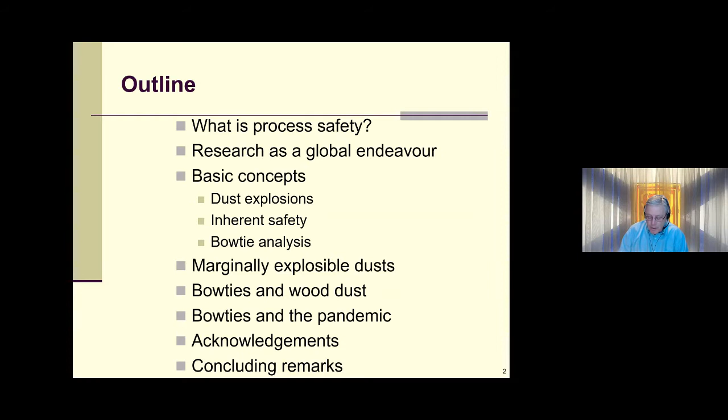So what is process safety? I've got a slide, but I'm going to first let the U.S. Chemical Safety Board describe what process safety is all about.

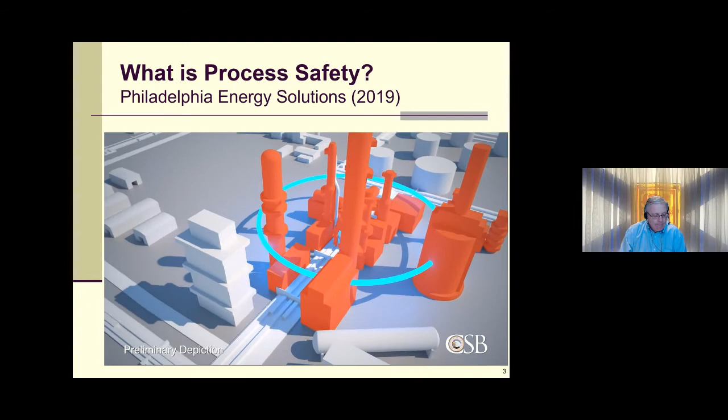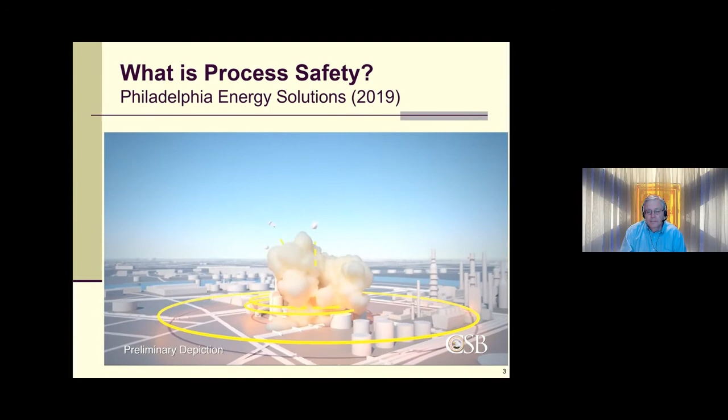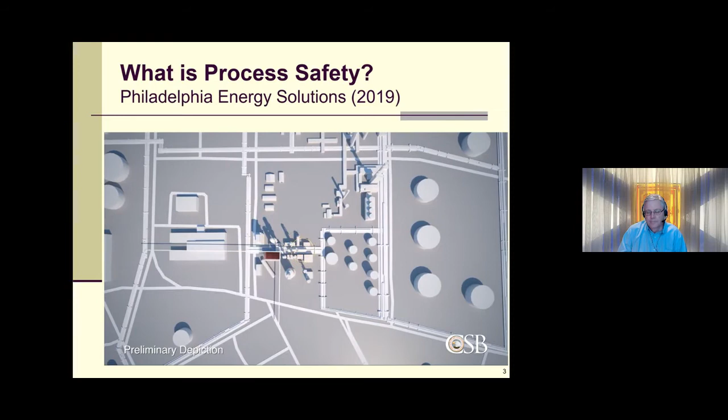June 21st, 2019. The Philadelphia Energy Solutions Refinery in Philadelphia, Pennsylvania. At 4 a.m., flammable process fluid containing mostly propane, along with a small concentration of highly toxic hydrofluoric acid, or HF, escaped from the refinery's HF alkylation unit, likely through a ruptured pipe elbow. The alkylation unit produced components of high-octane gasoline. The leaking process fluid formed a large ground-hugging vapor cloud that surrounded some sections of the unit. Two minutes later, the cloud ignited, causing a massive fire. A control room operator quickly took steps to prevent the release of additional HF by rapidly draining the unit's hydrofluoric acid to a special vessel designed to hold the acid in the event of an incident. At 4:15, during the ongoing fire, an explosion erupted in the alkylation unit. Four minutes later, a second explosion occurred. At 4:22, a process vessel in the unit containing flammable hydrocarbons violently ruptured, causing the largest explosion. A large 38,000-pound fragment of the vessel flew across the Schuylkill River and landed on the river's opposite bank. Two other fragments, one weighing about 23,000 pounds and the other about 15,500 pounds, landed inside the refinery. The fire burned for over 24 hours until it was finally extinguished the following day at about 8:30 a.m. Five workers sustained minor injuries during the incident and response. The CSB is unaware of anyone experiencing health impacts from the hydrofluoric acid release.

That's what the principles of process safety try to prevent. We'll just move on here. Just kind of hung up a little bit, but we'll get there. Oh, we don't want to watch that video again.

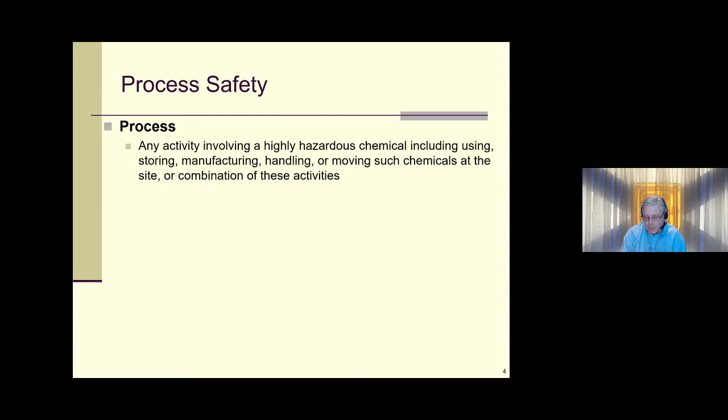There we go. So here's the slide on process safety. I thought the video would do a better job of explaining the type of incident that we try to prevent with our principles of process safety, but here's a few definitions. Chemical engineers are often thought of as process engineers, so I thought I'd first define a process. It's really just anything that we do in chemical engineering and process engineering that involves highly hazardous chemicals, and that's a lot of the operations that chemical engineers undertake.

So what is process safety? It's the prevention and mitigation of process-related injuries and damage arising from the big three things we try to prevent: fire, explosion, and toxic release. Some people would call this system safety, and that's our focus. We try to prevent and mitigate loss to people, property, process, and environment. Property loss is equipment damage, asset loss. Process loss is business interruption.

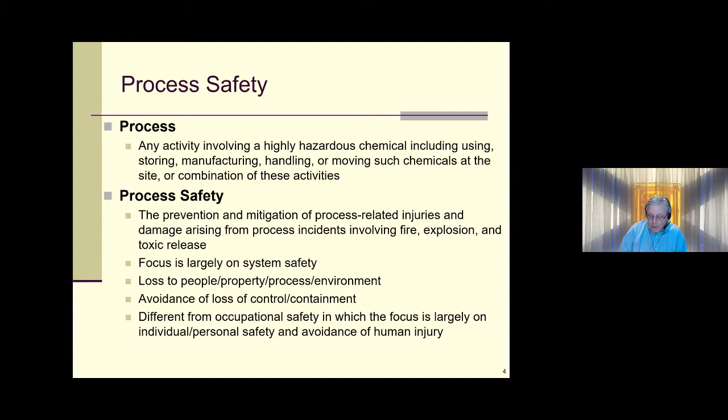We also try to avoid loss of control of chemical processes and loss of containment of what's inside the pipes and vessels. So as you can see, process safety is very different from occupational safety, in which the focus is largely on protecting the individual and the avoidance of human injury. As I mentioned, we talk about process safety being about keeping it in the pipes, and the 'it' is the hazardous materials and the energy that they contain.

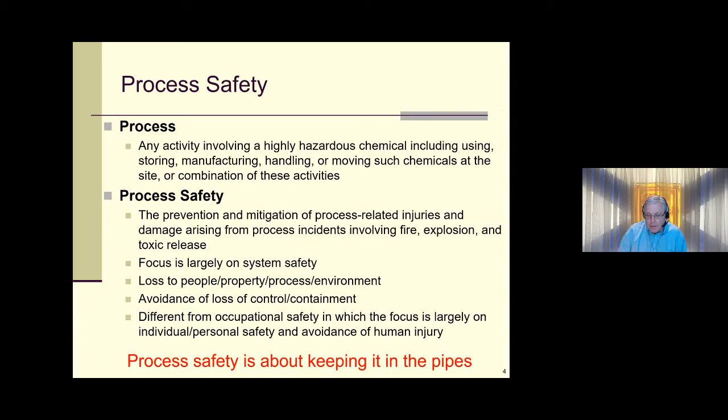When we don't keep it in the pipes, we end up with catastrophic incidents such as first Bhopal in 1984, release of methyl isocyanate, which killed thousands of people that night in December 1984 and has caused untold suffering to this day.

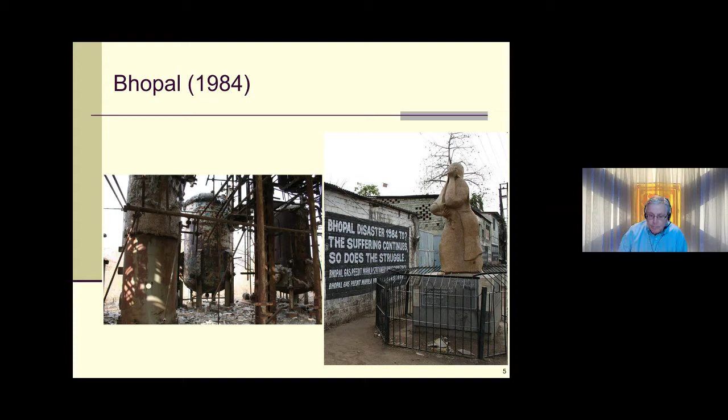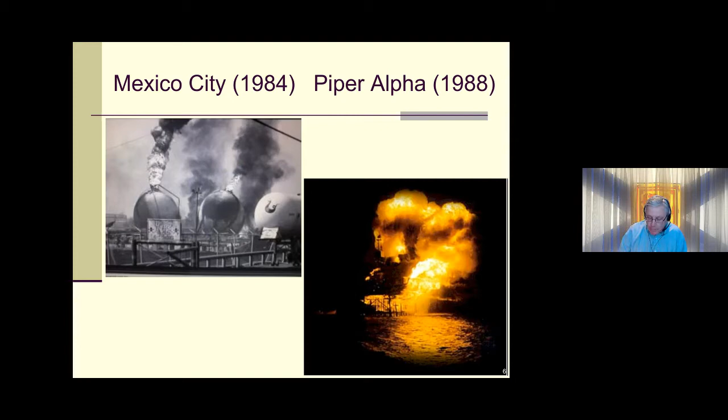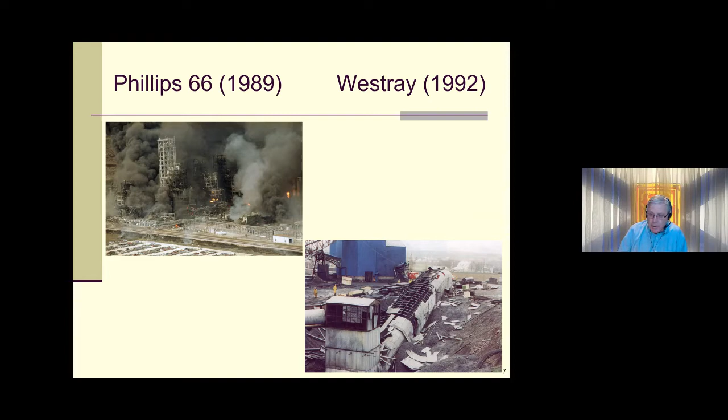Mexico City in 1984, liquefied petroleum gas. An offshore oil and gas rig, Piper Alpha, in the North Sea. Phillips 66, 1989, a polyethylene plant which suffered a vapor cloud explosion. I've included Westray here, not the process industries per se, but obviously a devastating incident in our own backyard, in 1992, in which 26 miners were killed.

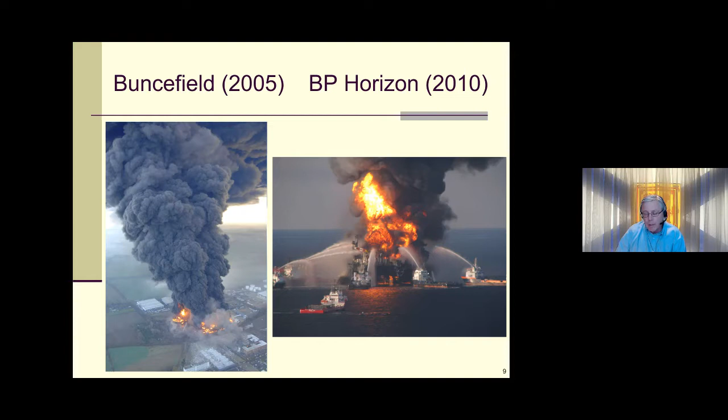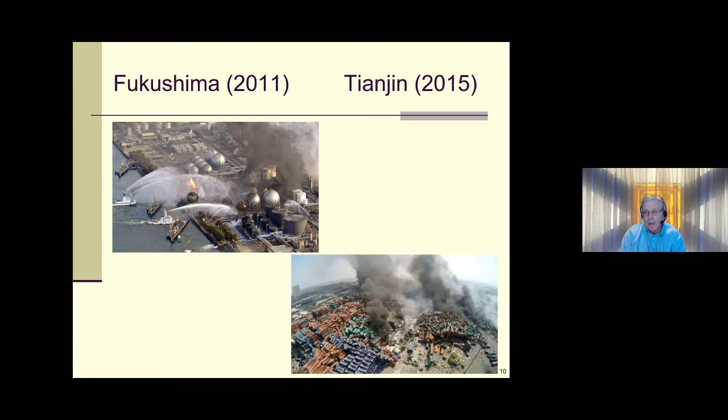Tianjin, a port in China, again an ammonium nitrate explosion. And most recently, of course, you'll be familiar with what happened in the port of Beirut in Lebanon. Again, massive quantities of ammonium nitrate being stored inappropriately. Not a process incident again, but there were many, many warning signs from the process industries that could have helped prevent this type of incident.

So I just wanted to talk a little bit about what we tried to do over the past 10 years in taking our research globally and collaborating with people around the globe. Of course, here we are in Halifax with our team at Dalhousie and local people as well.

My primary research colleague is Dr. Faisal Khan at Memorial University in St. John's, so put him up and his team of people there. Faisal happens to be in Winnipeg right now with family. And truth be told, the two of us have been trying to get down to Texas A&M to the Mary Kay O'Connor Process Safety Center for sabbatical, but unfortunately I don't think that's going to happen. So we'll take that off the map for now, at least for a while.

We are collaborating. One of the projects I'll talk about is with people in British Columbia in the wood pellet industry. The Marginally Explosible Dust project that I'll run through shortly involves the work of Albert Addo, a PhD candidate. Albert went home to visit family in Ghana for Christmas, and Albert's still in Ghana and likely will be there for some time, but that's all right. We're proceeding virtually, and his safety is first and foremost.

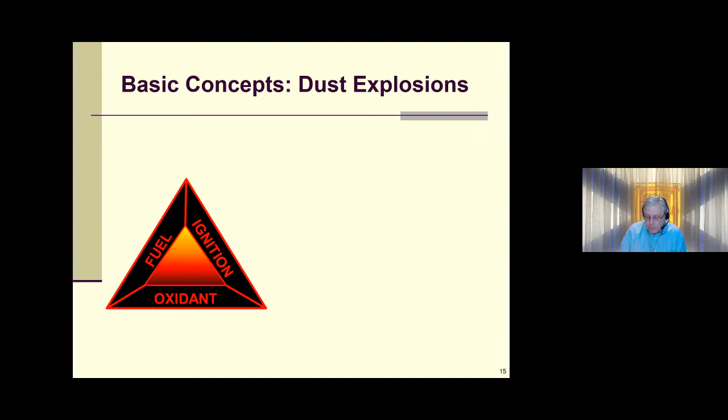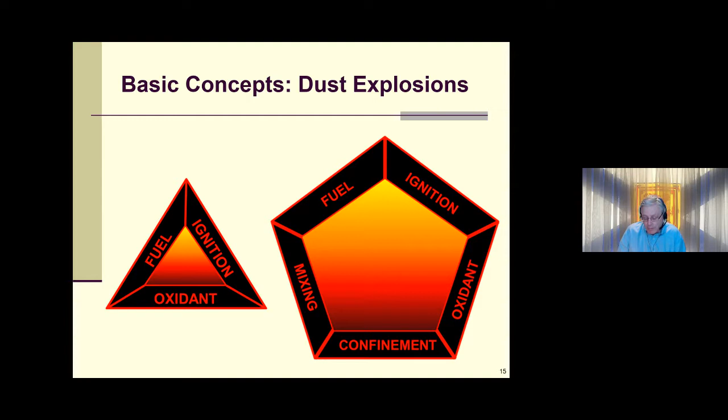We get to the explosion pentagon by adding two extra sides to this construct. The first is mixing: we need to get the dust airborne and formed into a cloud, so we have mixing of the fuel and the oxidant, which is the oxygen in air. Then we have some degree of confinement around that cloud. As combustion proceeds with ignition, the temperature rises, and the pressure also rises because of the confinement. Then we have mechanical work done on the boundaries of that confinement, and that's giving us an explosion.

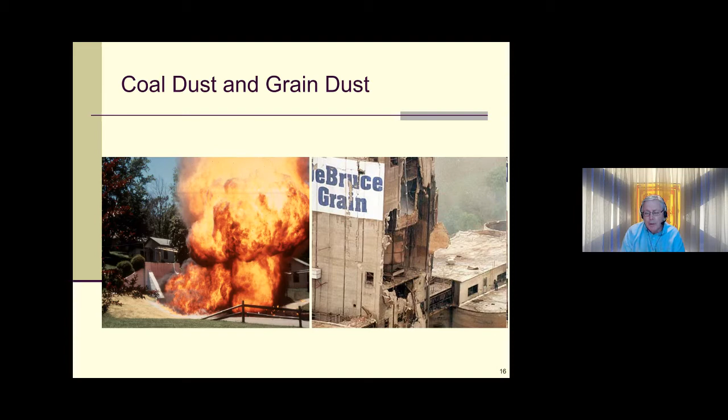You're probably familiar with coal dust and grain dust explosions. I mentioned Westray. Coal dust explosions happen, unfortunately, throughout the world with alarming regularity. Grain elevator explosions as well.

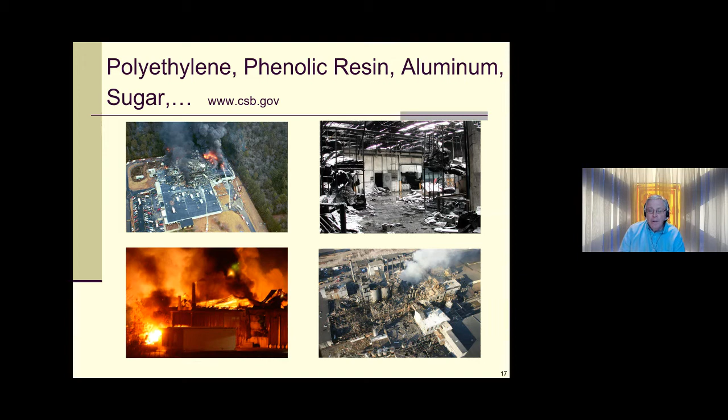But there are many other materials that can lead to a dust explosion. For example, polyethylene, and these are pictures of incidents investigated by the U.S. Chemical Safety Board over the years. Polyethylene, phenolic resin, aluminum, many metals, most metals are explosible. The bottom right-hand corner shows the devastation at the Imperial Sugar Refinery just outside of Savannah, Georgia. A horrific incident with a large number of fatalities and complete destruction of the process plant. So I want to show you an example of a dust explosion.

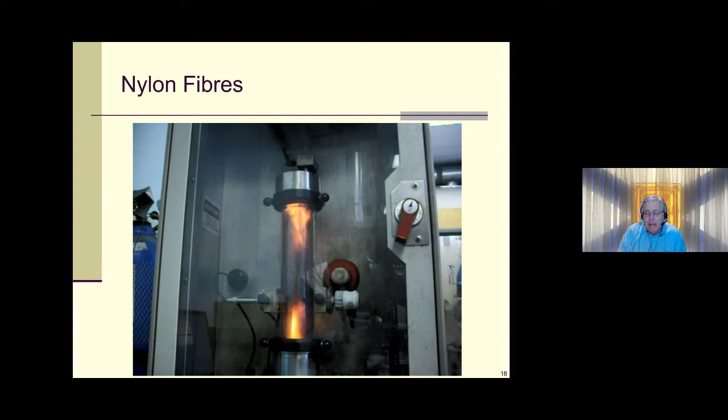So what you saw was the initial explosion. I should mention this is for nylon fibers, but then also lingering combustion in the cloud. This gives us some insight into the horrific accidents that occur sometimes in textile mills where fibers burn and explode. The shock wave, the blast wave from the explosion, does damage, but also significant harm to people occurs because of the flames that linger once the initial blast wave has passed.

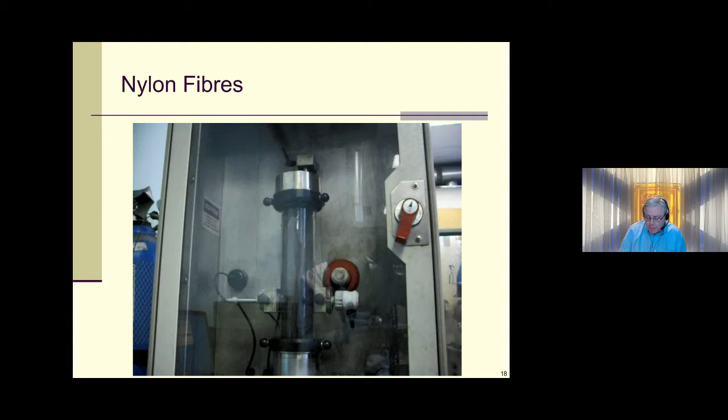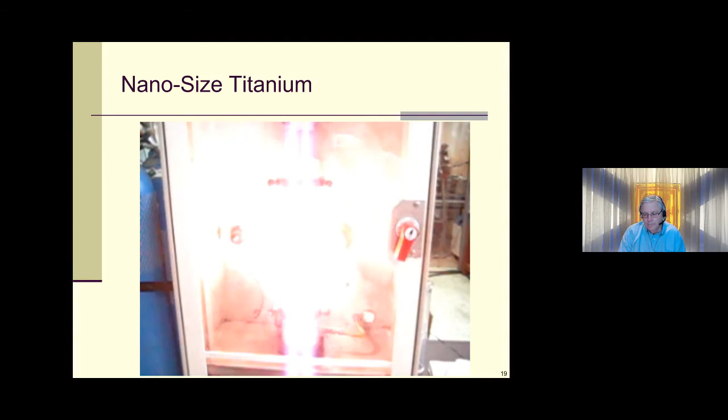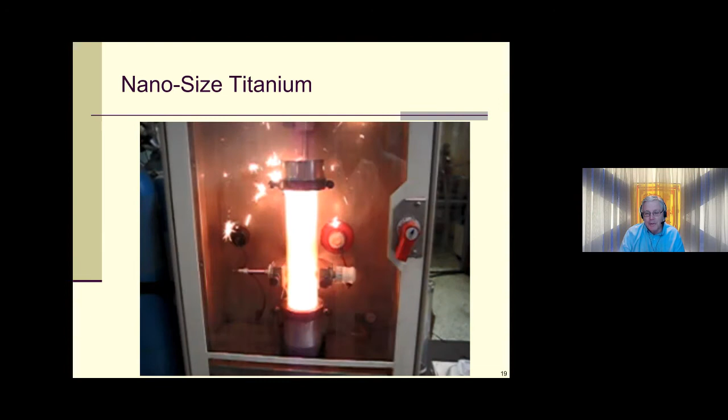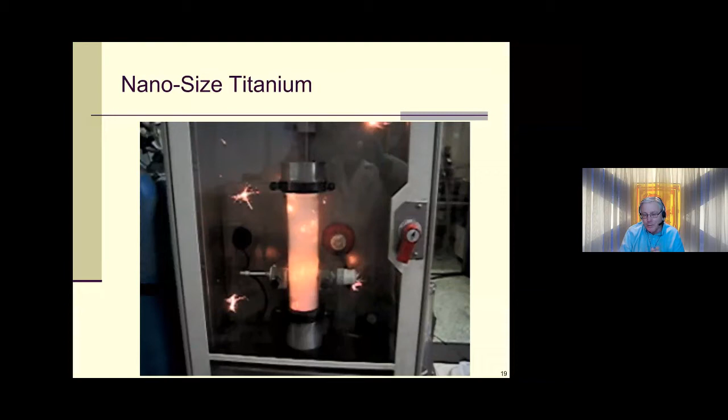Now it's a little more dramatic than it needs to be. That's just a normal digital camera, there's no filters or anything, so it's a lot of light coming into the camera lens. But you can see that the burning and the explosion is quite different from what we saw with the nylon fibers. You can see in the plexiglass screen there, that's Ivan Yarossi, an exchange student from Turin in Italy. Wonderful young man, came and spent 6 months with us. Great researcher. It's amazing, he never flinched during the taking of that picture.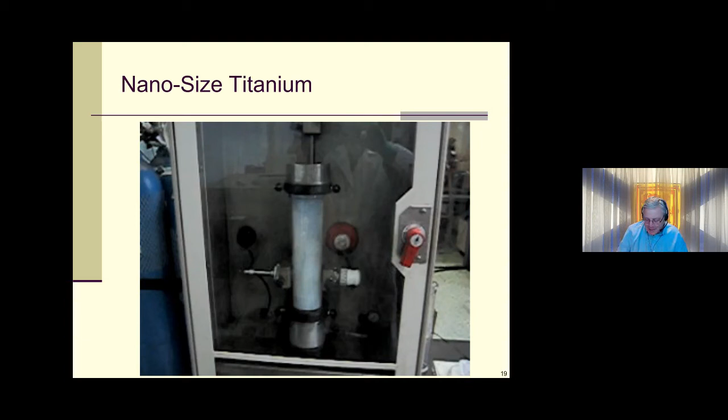All right, the second basic concept is inherent safety. This is a concept that was developed by Professor Trevor Kletz in response to what happened at Flixborough in 1974. About 40 tons of a chemical called cyclohexane, similar to gasoline, were released at this plant. It was a nylon intermediate plant.

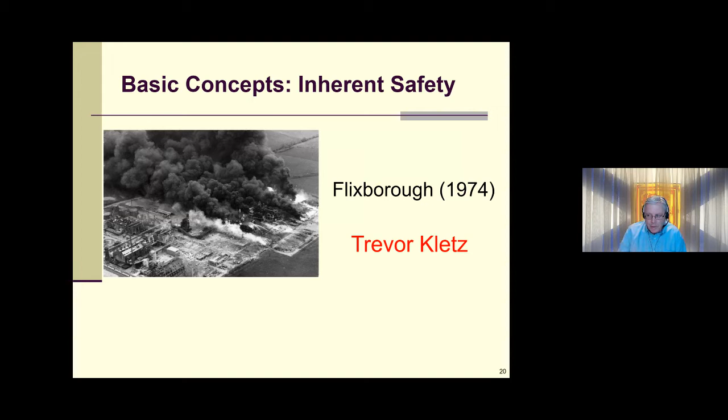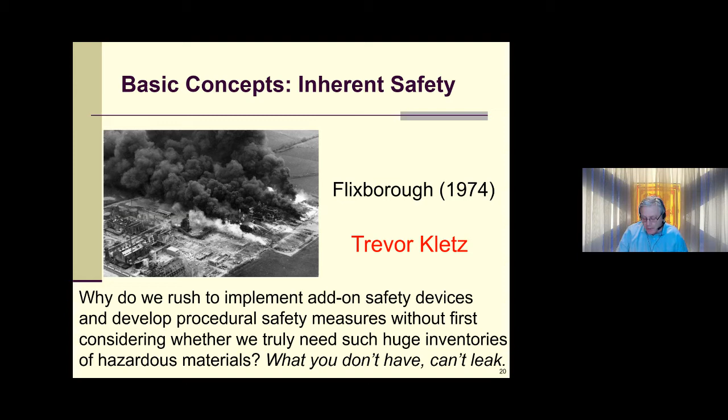As a result of this incident, a lot of people started thinking about adding on safety devices and developing procedures. Trevor asked, why do we rush to implement add-on safety devices and develop these procedural safety measures without first considering whether we really need these massive inventories of hazardous materials? He wrote a paper and coined the phrase, what you don't have can't leak. So with inherent safety, we're talking about trying to remove hazards at their source.

A couple of quick examples, classic Kletzian examples. If we're concerned about the hazard of stairs in a 2-story house, we can add landings and handrails and tell people to be careful, or we can remove the hazard and live in a 1-story house. Easier said than done, but that's the basic principle.

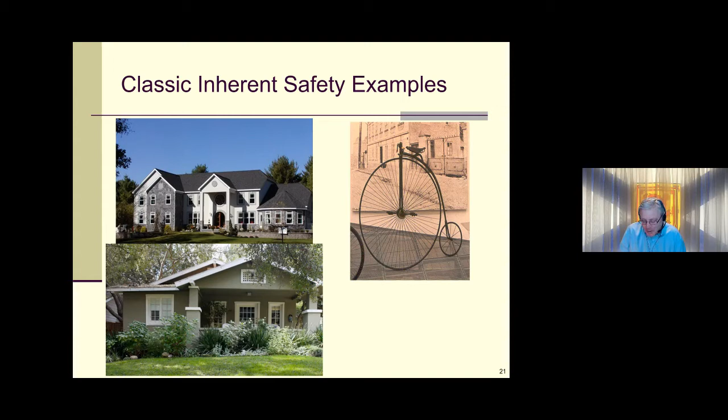There's a strong life cycle approach to this concept as well. From a stability perspective, what's inherently safer than that antique-looking two-wheeler there? Of course, it would be a tricycle. So that's the essence of inherent safety.

We place inherent safety in what we call the hierarchy of controls. When we're faced with a hazard, there are only 4 general ways we can deal with it. Least effective, work with people, safe work procedures, and so on. Next, in terms of effectiveness, we add on safety devices that require actuation and detection, sprinkler systems, for example. Then we add on safety devices that don't require actuation and detection, they just work by their mere presence, so an explosion rupture disc, for example. Most effective is inherent safety: eliminate hazards, minimize hazardous inventories, substitute with more benign materials, and so on.

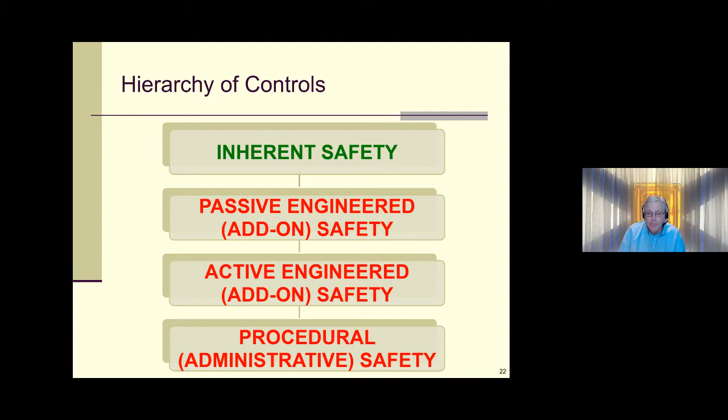The third basic concept is called bow tie analysis, and this is a form of hazard identification and analysis.

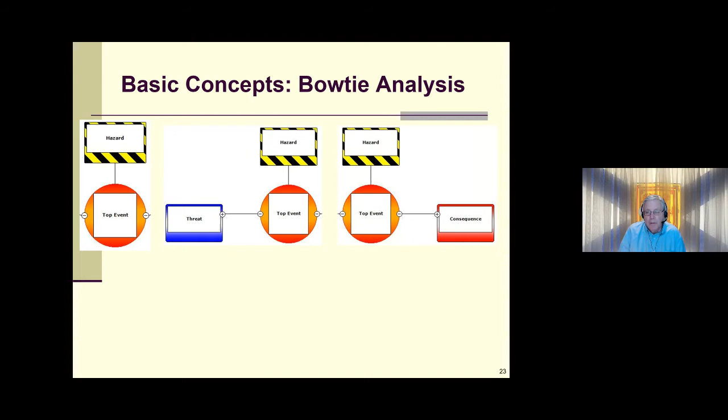So we start with a hazard that will lead to a top event. This is something we don't want to happen. The top event will be caused by a threat, and usually there are many threats that will lead to that top event. There will be consequences arising from that unwanted event.

But we can put barriers, prevention barriers, between the threats and the top event. These are our safety devices that act before the incident occurs. And we also put barriers between the top event and the consequences. These are called mitigation barriers, to help deal with the severity of the consequences.

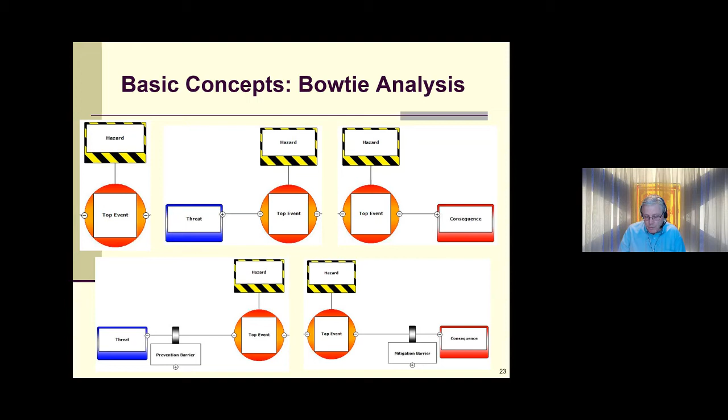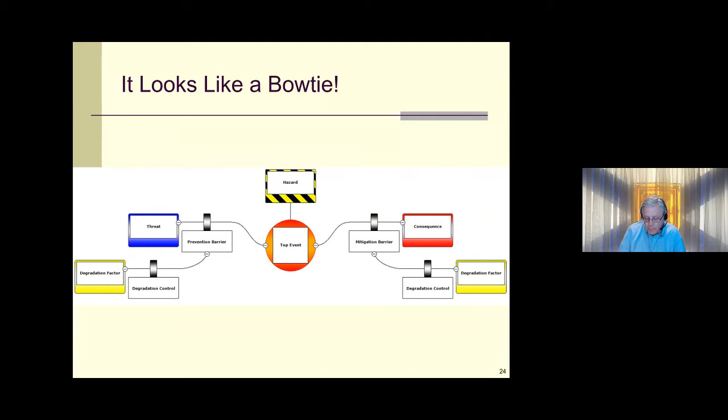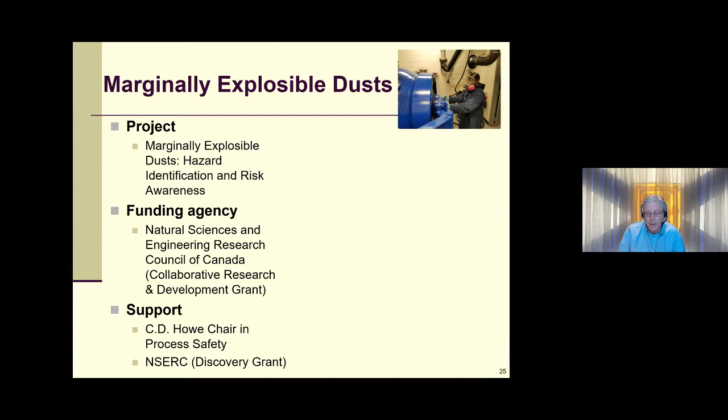So the first project I wanted to talk briefly about, these are things we have ongoing right now, is on marginally explosible dusts, funded through NSERC, through a Collaborative Research and Development grant with support from the chair and also my discovery grant. People involved at Dalhousie are myself and Albert Addo.

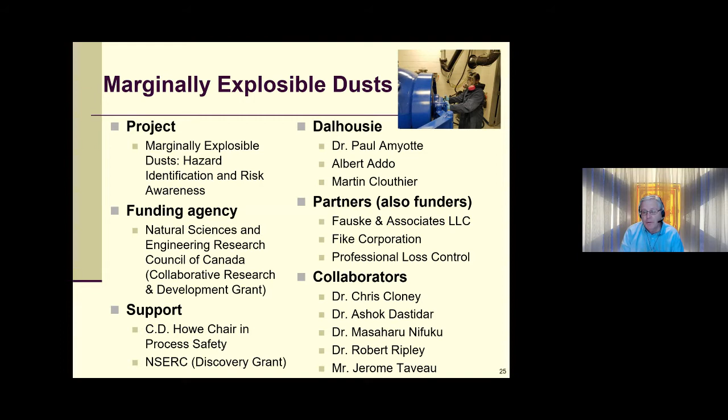There's Albert in that picture, pre-pandemic, operating the one cubic meter chamber in which we've done some testing. Martin Clouthier, a PhD student here in Halifax, also a consulting engineer. And you can see our partners located in the US and Canada, Professional Loss Control in Fredericton, New Brunswick, and also the key collaborators. So this project is all about a matter of scale.

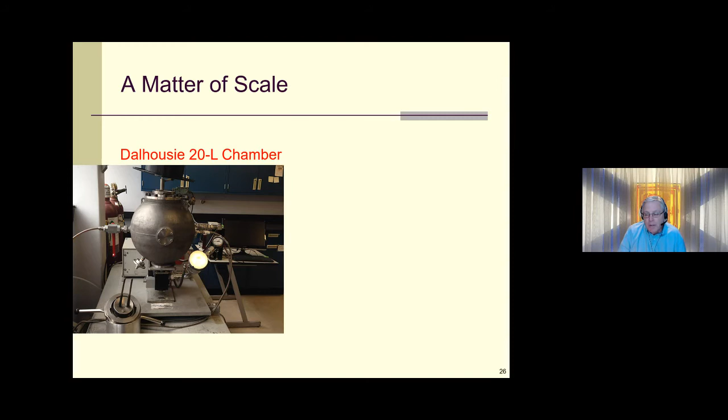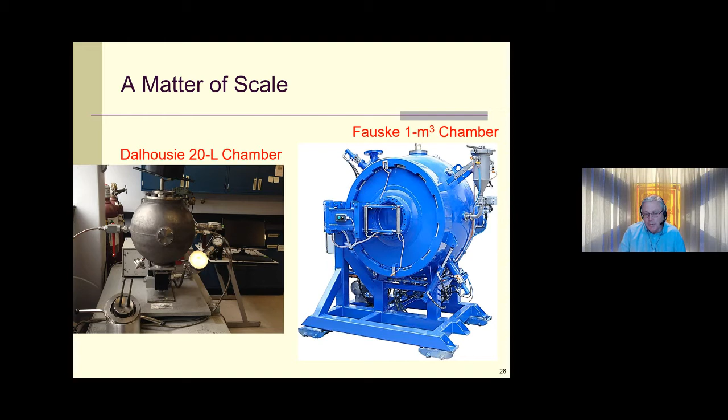But what we determine in this 20-liter chamber has to be applicable to industrial scale. So we check at the intermediate stage of a 1 cubic meter chamber, 50 times the volume, 50 times as much dust per test. You can't do as many tests per hour, maybe 1 per hour. There's Albert again, demonstrating that he can use that chamber.

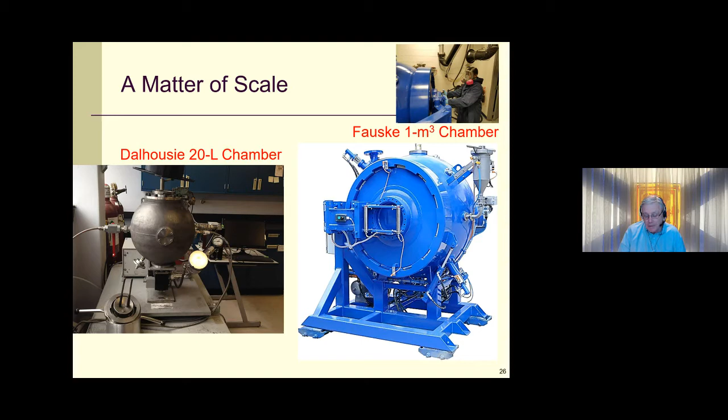This chamber is the one that I mentioned, with Dr. Ashok Dastidar at Fauske, just outside of Chicago. So what's the problem with this? Well, it's a dilemma for industry.

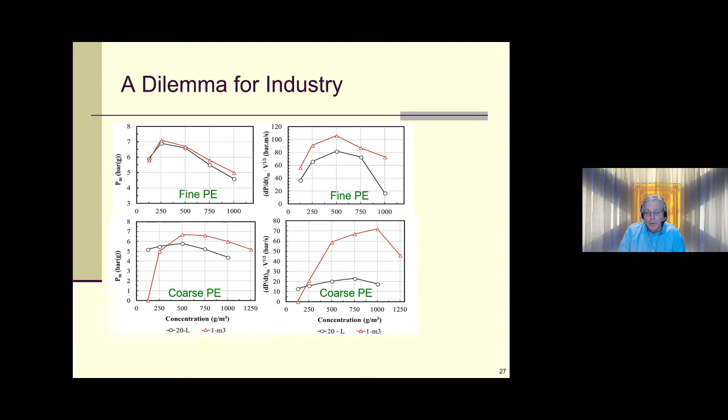The red line, the triangles, that's the 1 cubic meter chamber data. The black line, the circles, that's the 20-liter data. We'd like those 2 curves to match up very well, and they generally do, except here for the coarse polyethylene with the rate of pressure rise.

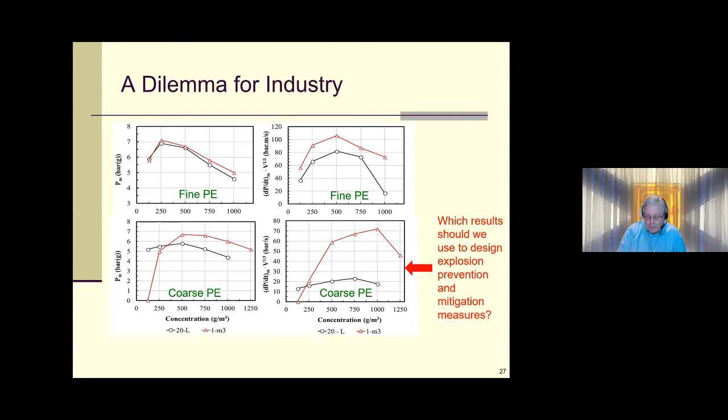So which results should we use to design explosion prevention and mitigation measures? It really matters. It's expensive to bring in these measures, so we don't want to overprotect, but if we underprotect, or say the dust doesn't explode when in fact it will at industrial scale, we're obviously greatly increasing the risk. So there's a number of groups throughout the world, including ours, working on this.

Current status for us is we've just completed some testing, again with Albert in Ghana, Ashok in Chicago, and me in Halifax. So we've got the data acquisition, and now we're analyzing carbon black, which we obtained from Michelin, oat grain, urea, and zinc. So that work is ongoing.

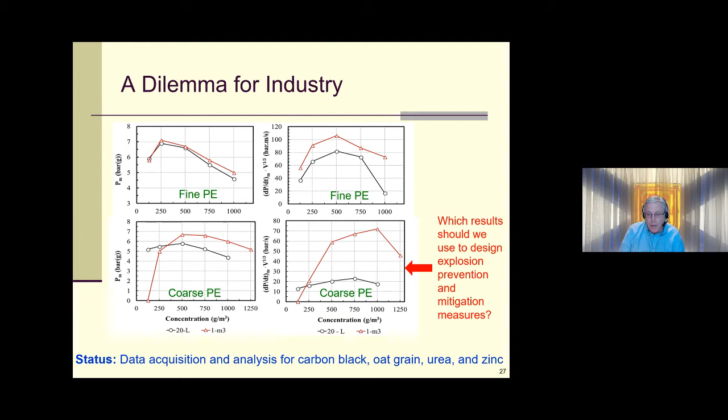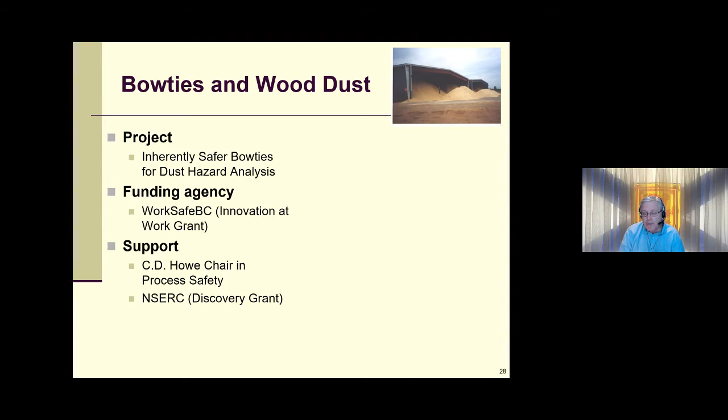The second project I wanted to talk about is a very recent one, using bow tie analysis with combustible wood dust. The funding agency here is WorkSafe BC, supported by the chair and my discovery grant again.

People at Dalhousie are myself, Eric Brideau, a master's student. Eric's also a consulting engineer in Halifax. Kayleigh Rayner Brown, a research associate with me. Kayleigh did her master's, finished last year, one of the first people to defend her master's degree during lockdown. She's just doing an excellent job in facilitating these bow ties with our partners out west.

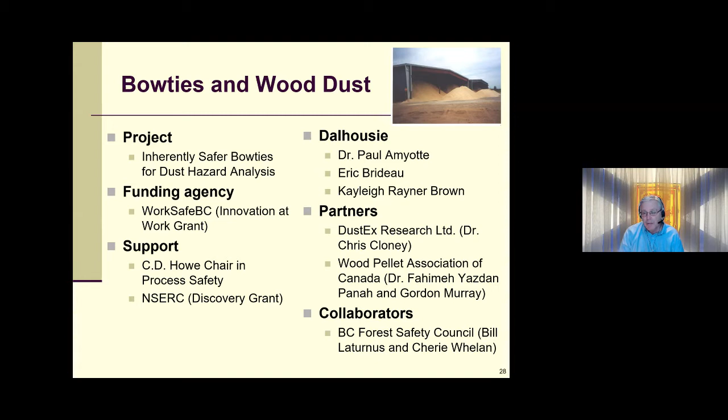And you can see Chris Cloney here in Halifax is one of the partners, as well as Wood Pellet Association and BC Forest Safety Council.

So what are we doing here? Well, here's an example of a hammer mill. This is used in the wood pellet industry to take sawdust, wood chips, and reduce their particle size to get them ready to be made into pellets. Here's the bow tie knot.

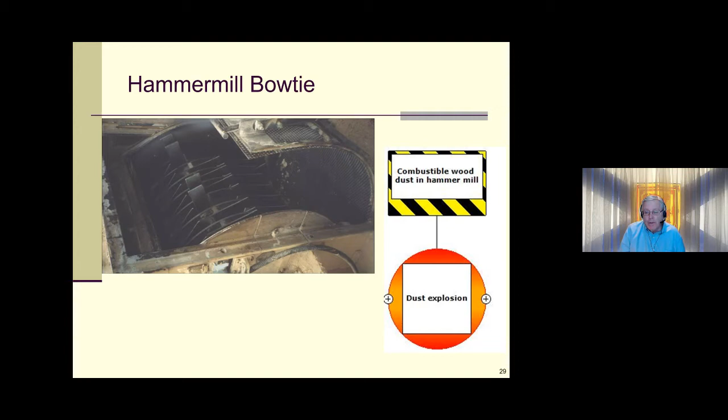The hazard is combustible wood dust in the hammer mill. The unwanted event, the top event, is a dust explosion. We have lots of threats, and I realize those are a little bit difficult to read, but they all relate to different types of ignition sources that could occur. We have lots of consequences, and they all relate to people being hurt in various ways, to business interruption, to asset damage, to harm to the environment.

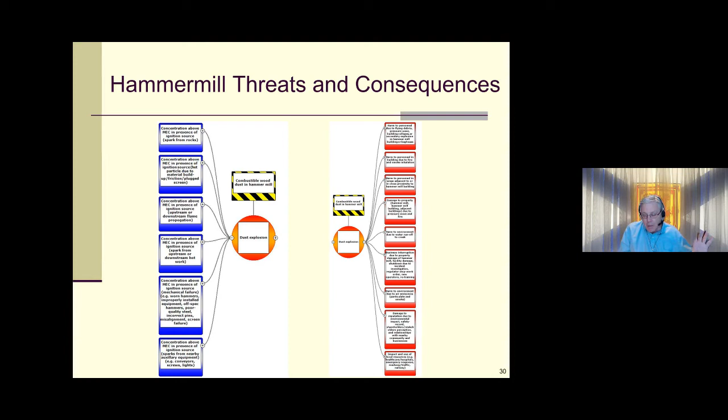Oh my goodness, we put in a whole bunch of prevention barriers. That's getting busy, let's get one you can see. So this is for the threat of an ignition source due to foreign debris, rocks, and tramp metal coming into the hammer mill with the feed stream. So we have a prevention barrier of mechanical scalping roll to separate rocks from fibers.

The next barrier I want to show is for the threat of hot work, bringing ignition sources, say for welding, onto site. So here our barrier is use of fire extinguishers and fire hoses and equipment being maintained and so on. Those are procedural, active type barriers. They're not inherent safety yet.

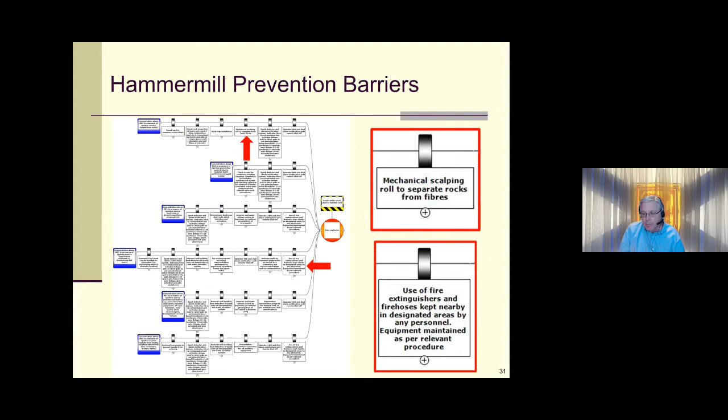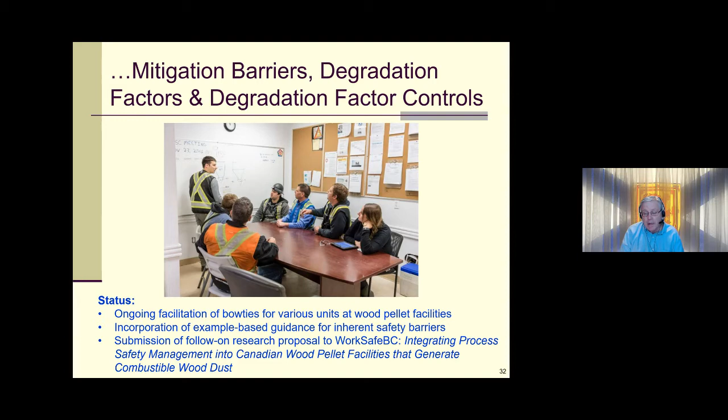So now we're working on incorporation of example-based guidance to get more inherent safety thinking into these barriers. We've also just submitted a follow-on research proposal to WorkSafe BC with our partners this time, Wood Pellet Association of Canada and the BC Forest Safety Council.

So getting near the end, the final project that I wanted to talk about that we have ongoing is working with, directly related to the pandemic, using bow tie analysis.

So 2 projects, one last summer funded through the Nova Scotia COVID-19 Health Research Coalition. And we developed a number of bow ties looking at hazards and different receptor groups, threats and consequences for the novel coronavirus. And we were successful with that work, successful enough to then apply and receive an NSERC Alliance COVID-19 grant. This has also been supported by the CD Howe Chair.

People working here, myself, Peter Vanberkel in industrial engineering at Dalhousie. Peter has been absolutely instrumental to this work with his knowledge of the healthcare industry and so on. And also, it's great to be working with an industrial engineer. Love chemical engineers, but it's not quite interdisciplinary, but it's getting there.

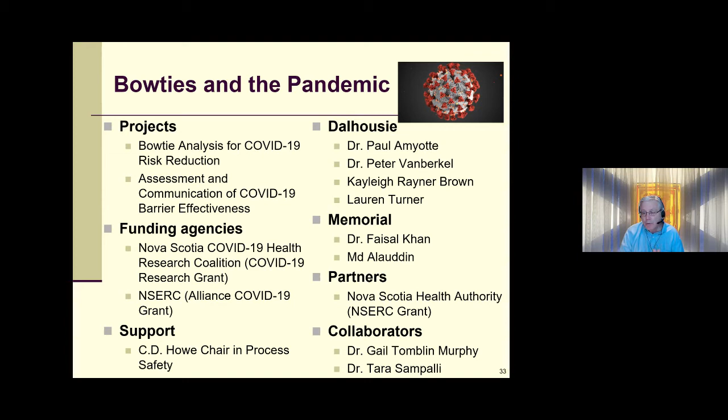Kayleigh Rayner Brown, of course, again, our research associate, and also Lauren Turner. This is her master's project. Lauren is a recent graduate of the undergraduate chemical engineering program. Also partnering with Faisal Khan at Memorial and Md Alauddin, a PhD student there, our current partner on the alliance work, Nova Scotia Health Authority, with Gail Tomblin Murphy and Tara Sampalli.

So I'm just going to cut right to one of the bow ties that we developed here. And you can see now that the hazard in the middle, in the knot there, is not wood dust. It is the coronavirus. The top event is that a resident, in this case the receptor group is residents in long-term care facilities, might contract COVID-19. We've got some basic threats on the left-hand side and some unfortunate consequences on the right-hand side.

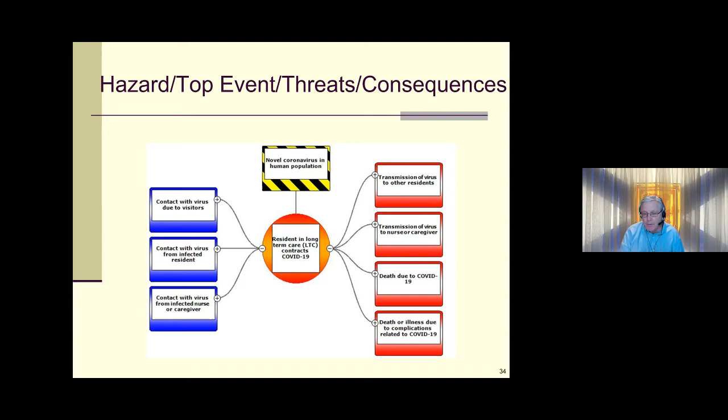So the threats are contact with the virus due to visitors, an infected resident, or an infected nurse or caregiver. So here's some barriers we can put in place for those three threats. We can close the long-term care facility to the public. Social distancing, everyone's familiar with that. Pre-shift screening. We'd like to think that social distancing is inherent safety because we're getting a separation distance, but it's really procedural because it relies on me and you not closing that 6-foot gap, and we make mistakes, and sometimes we do it deliberately.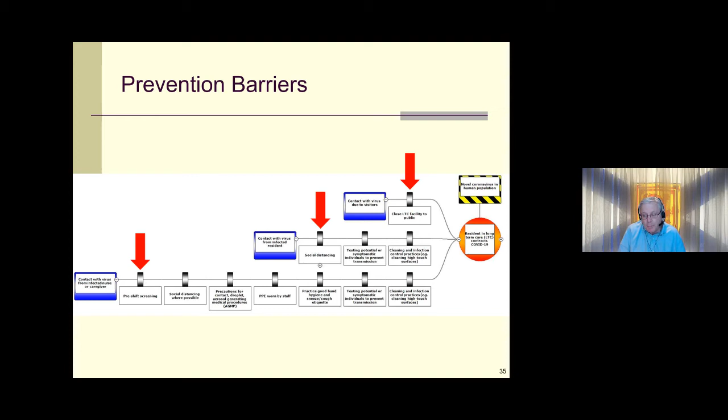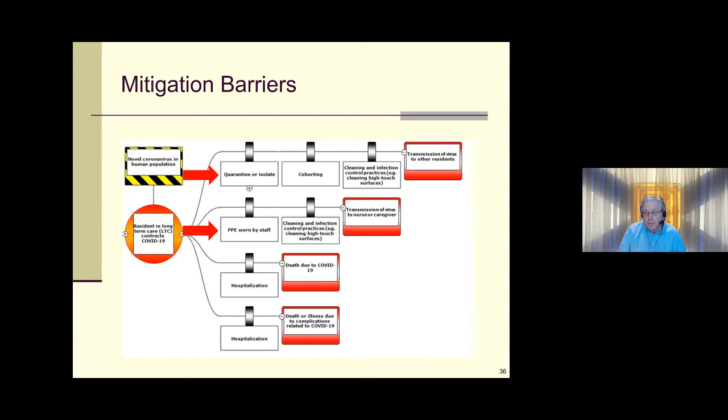Mitigation barriers, you can see here, we have things like quarantining or isolation, PPE (personal protective equipment) worn by staff, hospitalization. So now we put in degradation factors and degradation factor controls, and my goodness, again, it's getting busy.

So let's focus in on a caregiver coming into a long-term care facility. One of the barriers is that they will wear PPE, personal protective equipment. How can that barrier fail? There could be a shortage of PPE. How can we try and control that failure or degradation? Through a coordinated response to purchasing, through an expedited authorization process for personal protective equipment, for example.

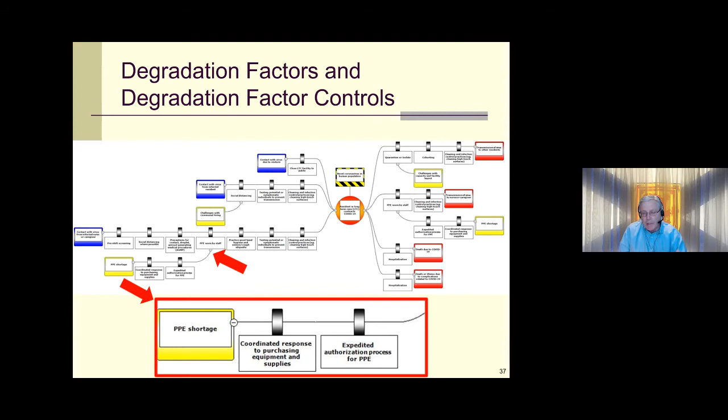So these are all barriers, all things that we've experienced as we've lived through the pandemic. We've been trying to organize them in a coherent, cohesive manner with the use of bow tie analysis. So it's not the complete picture, right? We don't have all our barriers, we don't have all our degradation factors and so on.

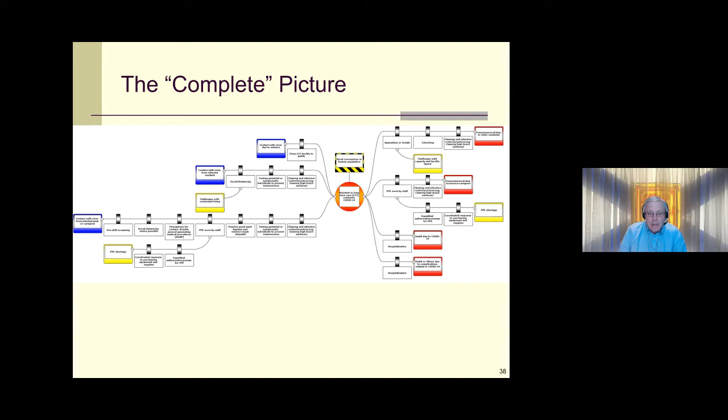So the current status with this work is that we've had some recent meetings and ongoing discussion. In fact, we have a meeting this Friday with folks from IWK and Nova Scotia Health Authority. It's really exciting work for us because there's a good deal of enthusiasm from our partners. And we'll be looking at bringing true inherent safety considerations into this analysis.

I have to say, former Premier McNeil and Dr. Strang, they were getting really close to inherent safety. Maybe they were even there with their 'stay at your blessed home' message, right? What a barrier, right? That's getting pretty close. We can't eliminate the virus just yet, maybe never, but stay at your blessed home has a lot of overtones of inherent safety. Really like that.

And then we'll also be looking at exploring bow tie application, it's a great communication tool. It can be used for policy making, decision making, and also post-pandemic operations.

Well, that's a whirlwind tour. I hope I'm at about a half an hour, John.

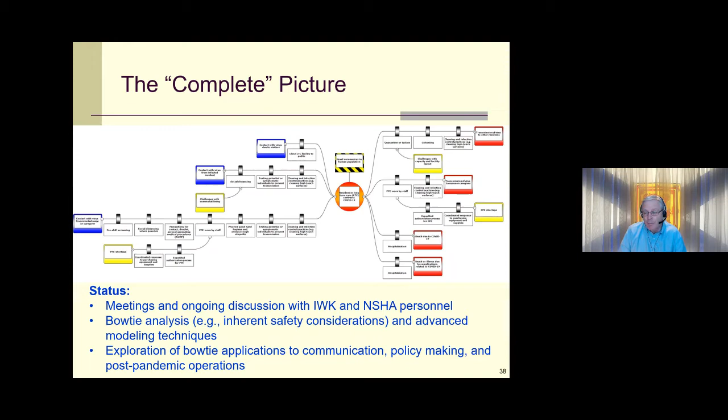I just want to conclude by acknowledging a few people, my family. The chair position has given me funding and time. My family gives me love and understanding, and that's priceless. I want to thank all my research team members now, then, and in the future. Dean Josh Leon, under whom I started the chair, and of course, Dean John Newhook, who's been very supportive of my continued activities in the chair position. I want to acknowledge and thank the CD Howe Endowment Fund, NSERC, and all the other sponsors of our work.

My final remarks. Okay, and I'm going to give some apologies to John Donne here. No researcher is an island entire of itself. Every researcher is a piece of the university, a part of the global community. I truly believe those words. I want to say that holding the CD Howe Chair in Process Safety for that 10-year period and representing Dal in that capacity, it's been a real pleasure and also an honor. And I've been truly blessed to work with a lot of talented and dedicated individuals, especially those whose research I've presented today. Thanks, John. I'm happy to take any questions.

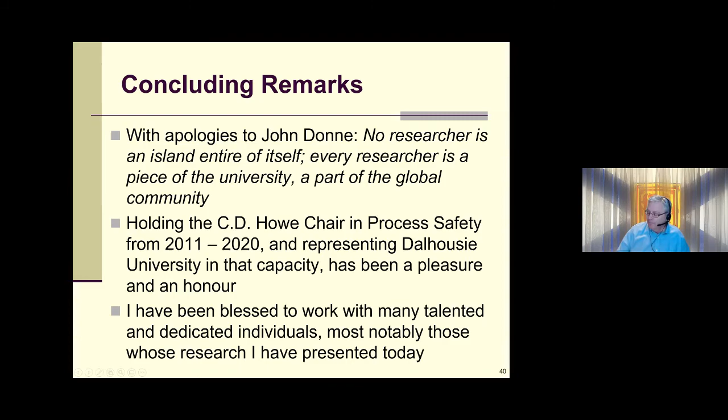Thank you, Paul. You covered a lot of ground quickly. Impressive. I noted the global impact of what you're doing, both in terms of your research team, but the projects and the issues you've been researching certainly have global reach as well. And I think that's something, as engineers, we highly value the impact we can make. So thank you very much for that.

First question I have for you, it's an interesting question from one of our viewers. Do you ever feel the pressure of having people's safety depending on your work? If yes, how do you manage that?

That's a great question. I don't know if it's so much pressure as I feel a sense of obligation. You'll find that, and I have a lot of colleagues who do an awful lot of good work in this area throughout the world, in process safety, but also in occupational safety. I could name names of people, and they might be on this call, right? People I know, members of Engineers Nova Scotia, who just do such exceptional work in the field of occupational safety.

I'm going to name a couple: Craig Arthur, Conrad Liliev. These are folks who are really out there working. I don't feel a pressure so much as an obligation. I think you'll find the people I just mentioned, and others who work in the field of safety, do feel obligated to do a good job, to do the best they can, and in the case of a researcher, to do research that has really strong science and engineering underpinning to it, and then to communicate that in an effective manner. Because the classic saying goes, if you have an idea but don't communicate it, you don't have an idea. So it's not so much pressure as a joyful obligation, I'll put it, to spread the story.